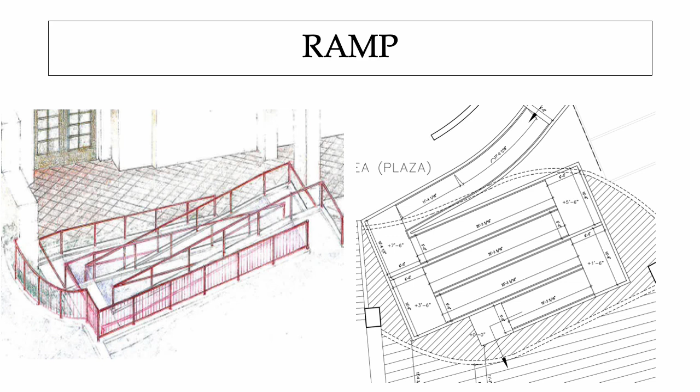Over the last several years, these designs have evolved with much parishioner feedback. With the desire to have better accessibility, we've researched and considered a ramp and an elevator. There are some who would prefer the ramp, however, an elevator has generally garnered more support as it would accommodate a broader demographic of people with disabilities.

At the Parish Assembly, we are affirming the elevator as the parish's preferred method of accessibility for our grounds, as more research is needed to determine the specific type of elevator best suited for the space.

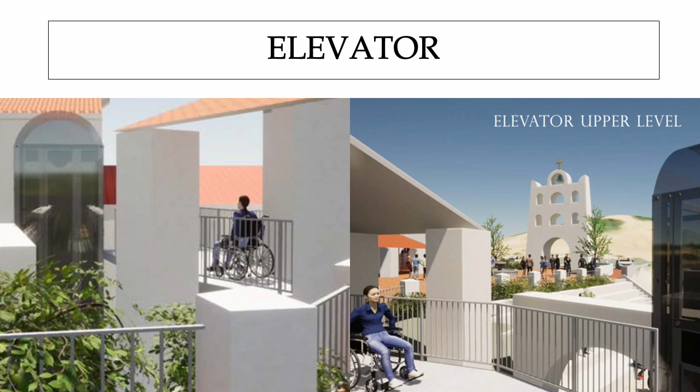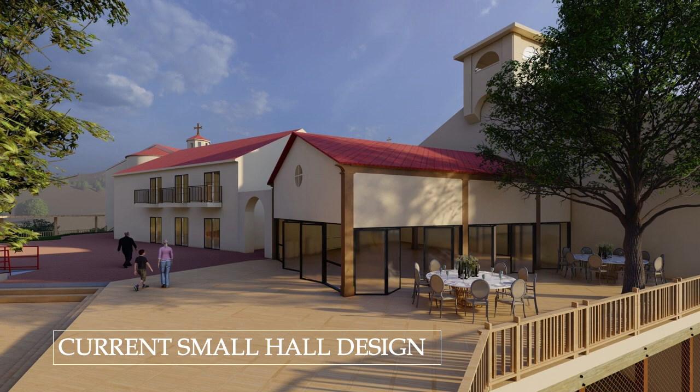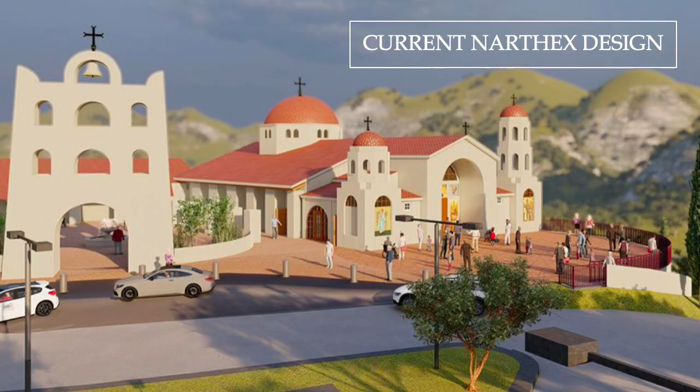The original narthex design encompassed a larger footprint with gold domes, new gold crosses, and the existing cupola. After much parishioner feedback, the narthex addition was reduced to 1,800 square feet with shingled domes and black crosses to match our current structure. Additional parishioner feedback also inspired an enlarged dome to be inserted into the plans, as it would indeed complete the traditional Byzantine architecture of our church.

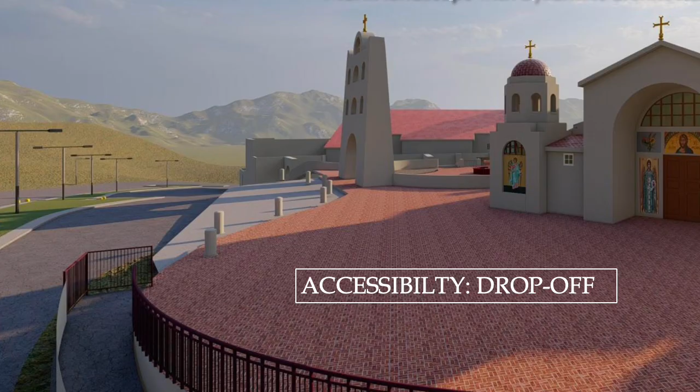This was submitted to the City of Novato to understand if a large dome and all the other components were even a possibility. The Design Review Commission and Planning Commission responded with overwhelming support and approval for this entire architectural design. Beginning with the front of the church, the newly formed drop-off location adds another element of accessibility to those attending worship services.

The interior layout of the narthex will address the functional needs we are currently lacking: a bookstore or visitor center, a cry room, needed storage, and of course, 2 public restrooms. To complete the interior component of the new entrance, the center section of the loft would be raised to allow for the desired 10-foot high doors.

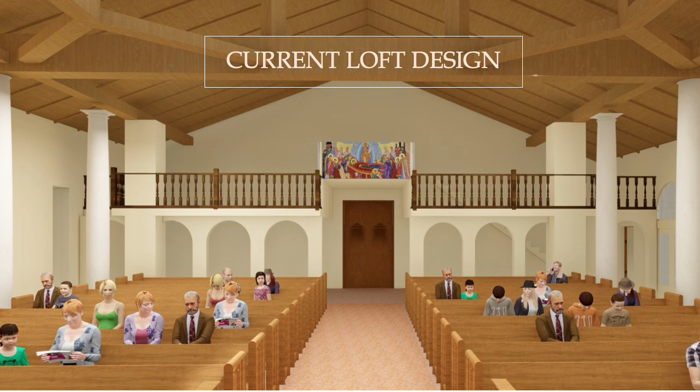The last element is enlarging the center dome, which doesn't simply offer an exterior aesthetic, but also a beautiful representation of Christ looking down from the heavens through the icon of the Pantocrator. The current architecture of our interior space offers the opportunity of enlarging the dome through laying additional beams to span across the existing large columns.

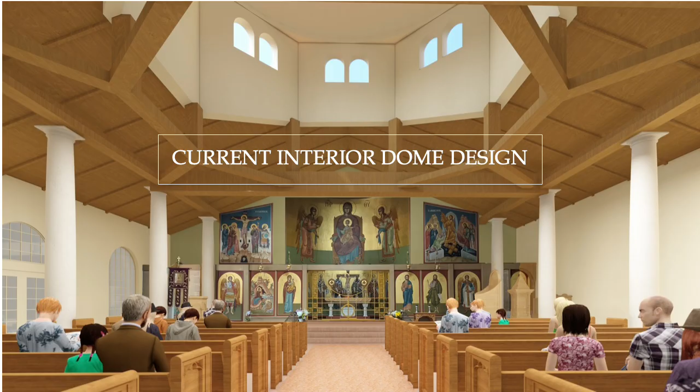The proposed enlarged dome, which only would be possible through a fully funded narthex, would certainly open the heavenly environment of our church with additional rays of the sun and an appropriate icon of Christ, signifying that He is the light and life of the world.

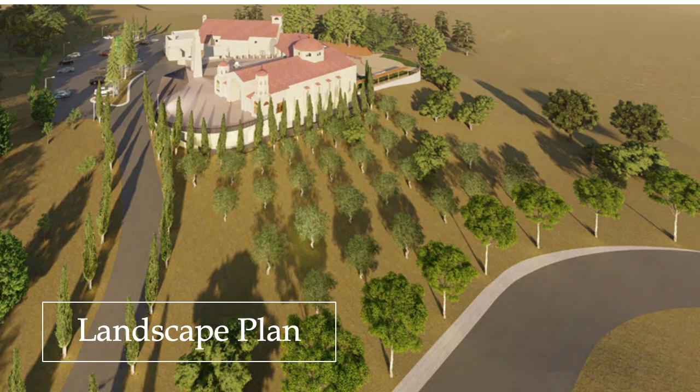We are also in the process of finalizing a landscape plan with neighborhood London planes and olive trees, as well as a lighting plan to adhere to the dark sky ordinance of the City of Novato.

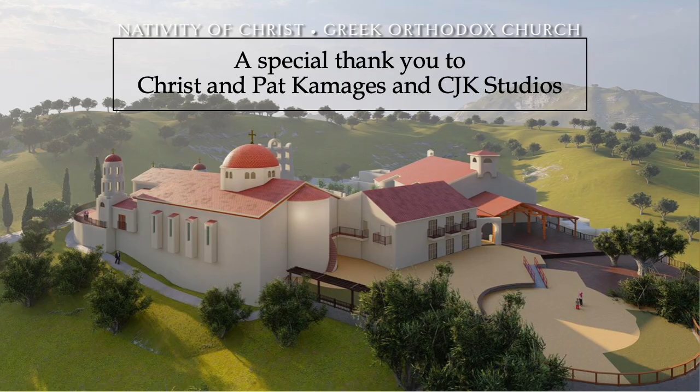The community offers its sincere appreciation to Chris and Pat Kamages and CJK Studios for donating the time and resources to complete all the architectural renderings and the documents needed for this entire process with the City of Novato. We also thank them for continuing to donate the architectural components of the soon-to-be-completed construction documents.

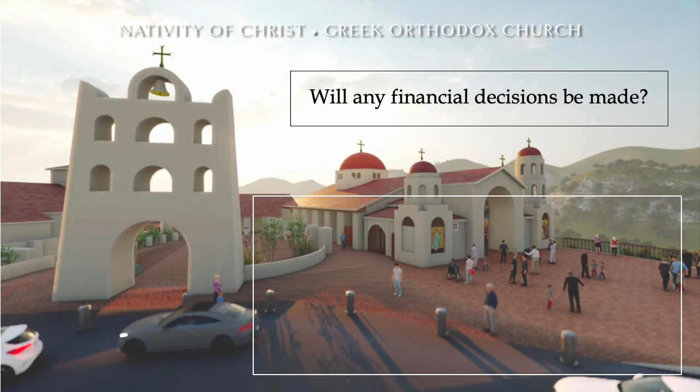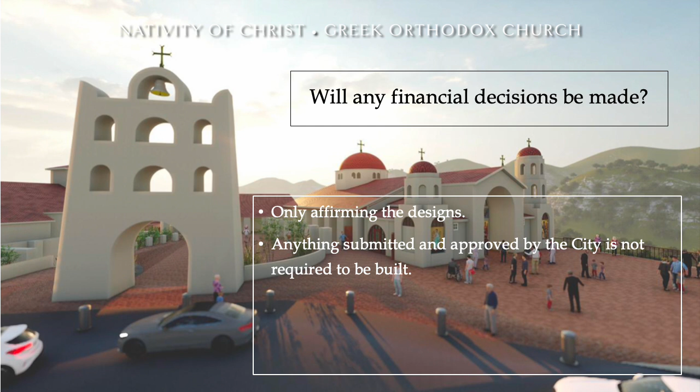It is important to remember that at this parish assembly, we are only approving designs and are not financially committing the parish to any project. We anticipate the City of Novato's full approval of these projects, but the parish will approve our financials and the beginning of construction at an additional parish assembly after bidding and fundraising.

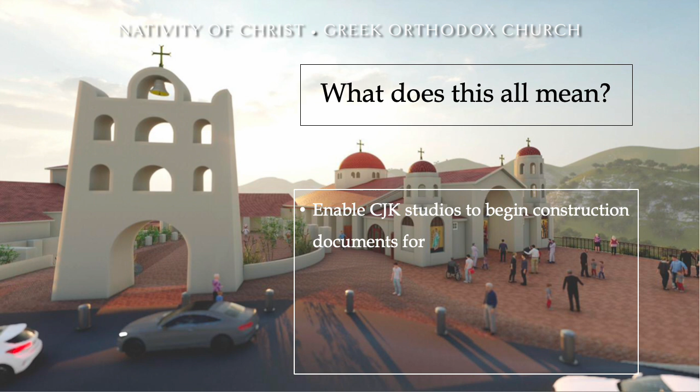Affirming the designs of these remaining Beyond 50 capital projects will enable CJK Studios to begin the necessary construction documents that will be used for obtaining building permits from the City of Novato, which will also be used for a competitive bidding process as well as a parish-wide fundraising effort.

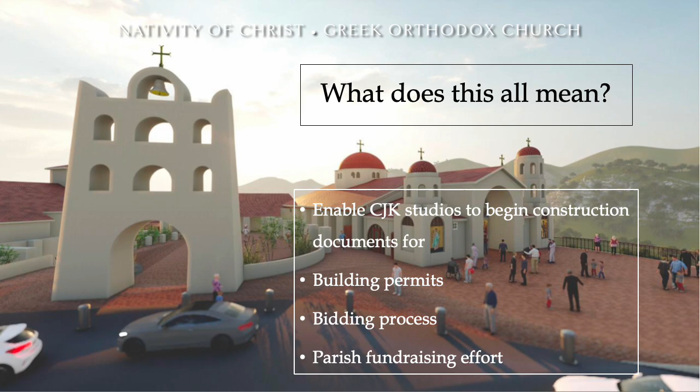With this in mind, the Parish Council has composed a proposed motion for the Parish Assembly which reads: I move that the design drawings as presented for the remaining large capital projects of the Beyond 50 plan be affirmed so that construction documents can be produced. This in turn will allow us to submit for building permits, conduct a formal bidding process, and initiate a parish-wide fundraising effort.

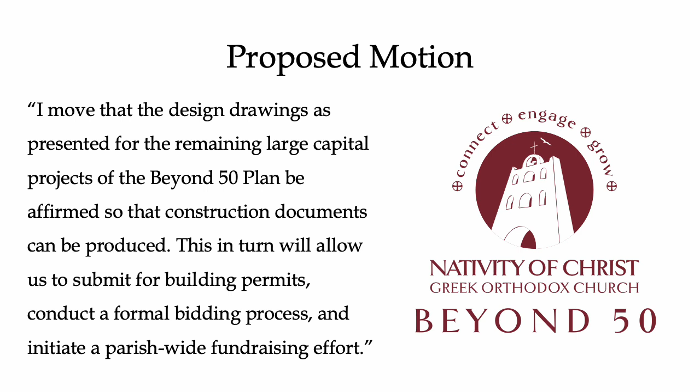In closing, we thank all of our Nativity of Christ parishioners for their prayers and support as we pursue these possibilities for our community. We encourage your involvement as we connect, engage, and grow through a unified vision of not what Nativity is, but what Nativity can strive to become.